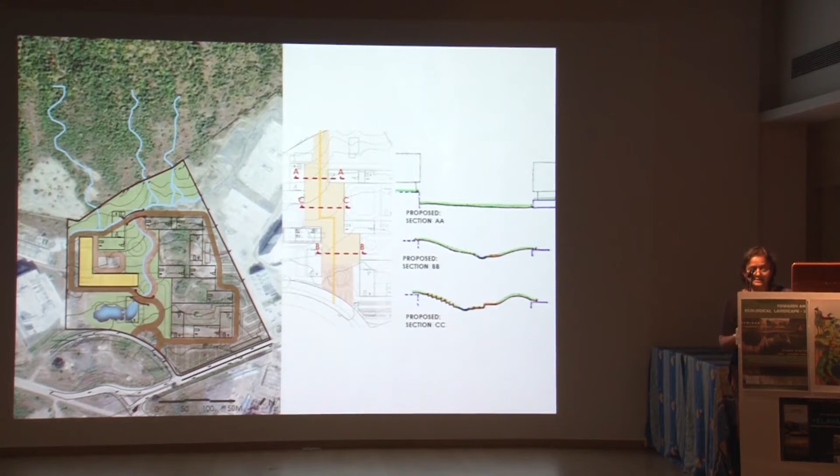So since spatial pattern strongly controls all these 3 aspects, that is flow, continuity and change, changes were proposed in the master plan for vehicular movement and also the grades, resulting in a continuous valley flanked on either side by undulations that connect the built form with the land, a depression towards the lower end, that is the southern end, and a few pocket gardens as outdoor building extensions. No soil or murum was borrowed from outside the site for any of this activity.

The bottom of the valley is designed as a bioswale to carry, filter and recharge water, terminating in a water garden that overflows into the quarry. Capacity of the quarry is increased by raising the sides. Undulations are visualized as forests of local, environmentally beneficial vegetation, whereas pocket gardens are manicured exotic extensions of the built form, and are very much restricted in area.

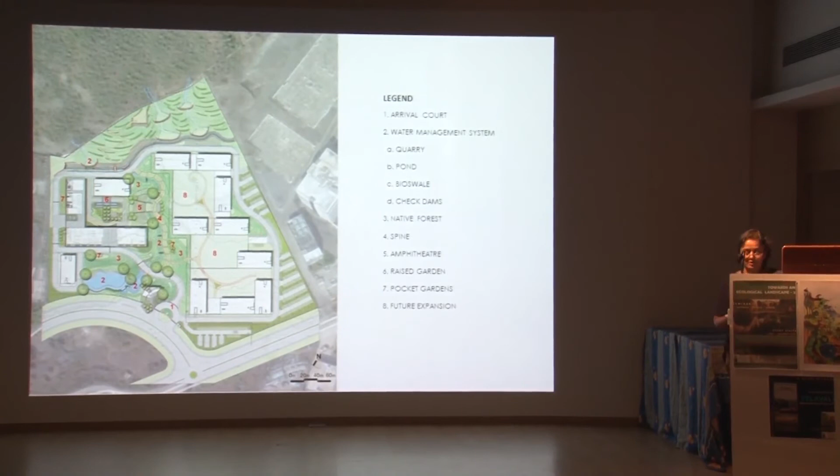The curvilinear forms help in many ways. We thought curvilinear forms would help us in achieving what we wanted to achieve. We thought that they'll help us in creating diverse microhabitats, they'll help us in increasing travel time of the water because the gradient is substantial, and they also will help us in increasing the surface area for plantation.

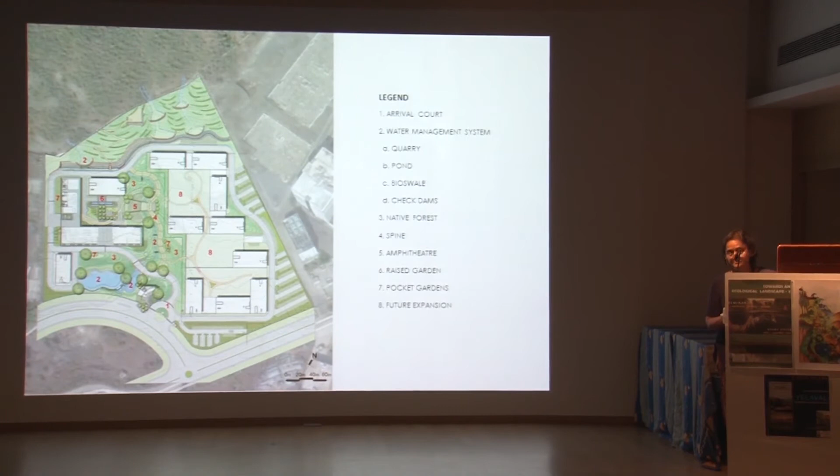Transitions and edges, this was the second aspect we focused on. Transitions and edges, we feel, also play an important role in creating corridors as well as microhabitats. So as I showed you in the earlier slide, we worked a lot on how one landscape component merges, or connects with another landscape component.

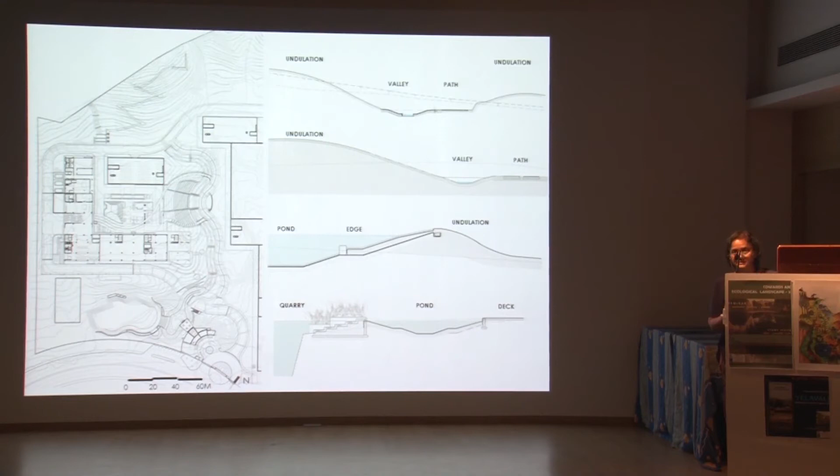The third important aspect of this exercise was planting design. And the basic principle was try and get the right plant at the right place.

It was a conscious decision not to create generically ideal conditions for planting of major areas by borrowing soil from outside the site. So existing murum, which came out of the construction, and there were some areas of black cotton which were getting constructed eventually. So the black cotton from those areas with no inorganic additives is used as a planting media for all areas except for the pocket gardens.

Various planting typologies and sub-typologies were identified. For example, foothill, forest area. Within forest area, again, what would go on the edge, south-facing slopes with least backfill, east-facing slopes with substantial amount of backfill. Similarly, swales and pond, the bottom of the pond or bottom of the swale, the edges depending upon their moisture content. And shortlisting of plants was done with the help of team Oikos.

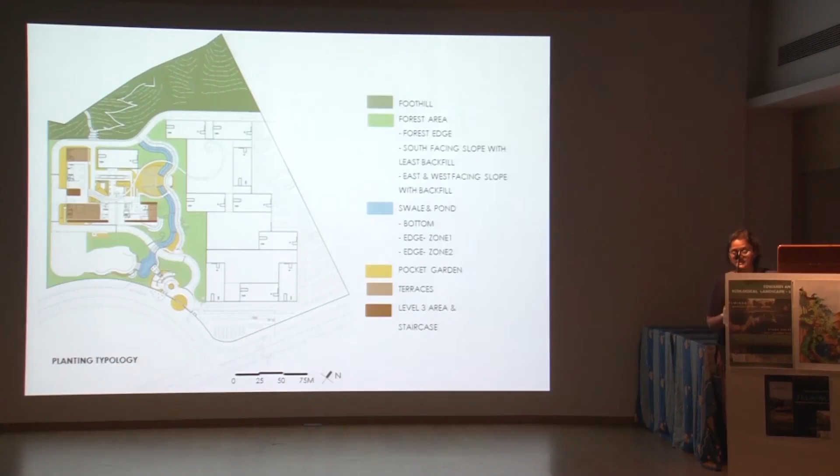Plants were ordered at least 9 to 10 months in advance, because getting some of these species in large quantities was a big challenge. This was done before even the planting plans were made. So we were helped by the Oikos team with the shortlist of plants, but as we had very little knowledge of most of this vegetation, we had to do a lot of studies to understand their visual qualities, seasonal changes, growth rate, because we wanted to look at the whole thing not only as a mixture of species, but compositions which are also aesthetically appealing.

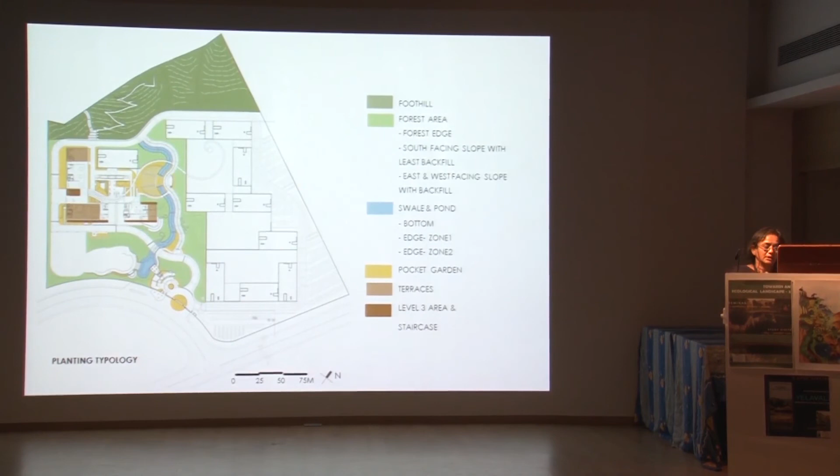So the first component was the foothill. So this has been looked at as a continuity of the hill landscape beyond. Species that are dominant on the hill are used to create planting structure with random mixing of other beneficial species. These slides show some of the species that we selected for plantation.

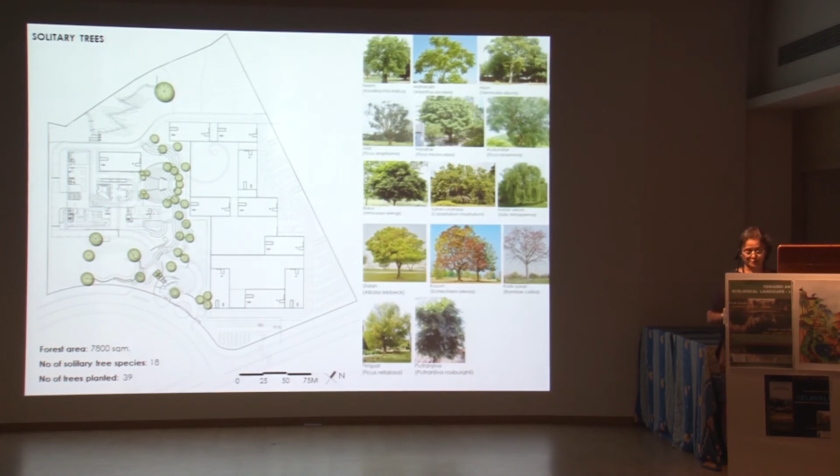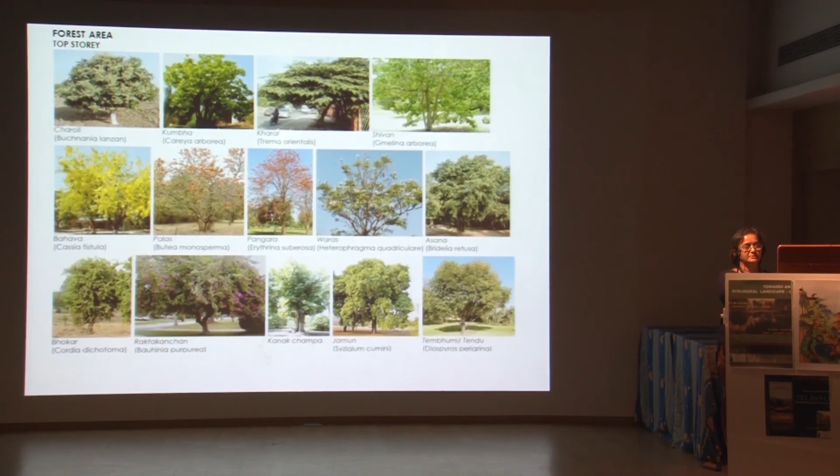The second was all important locations were marked for planting of very large trees, some of which eventually would be key species. For this, again, different species were chosen. Then the forest is a carefully planned mix of diverse species in 3 stories. Plantation is fairly dense. Large part of the forest floor is left open to develop on its own. So these are some of the species that we chose for planting in the forest patches.

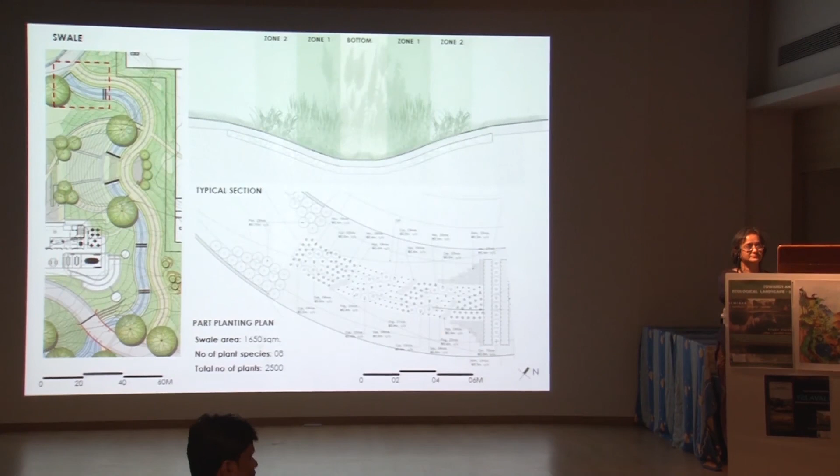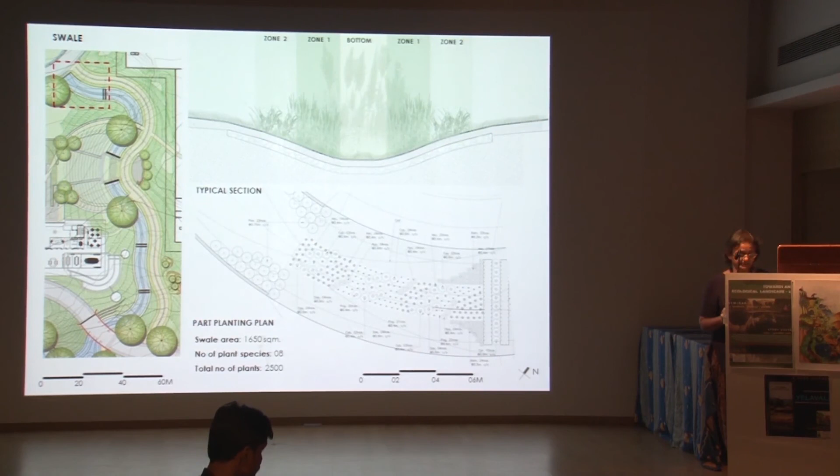Pond or water garden planting is approximately a proportionate mix of submerged, emergent and floating plants, and the selection of the plant varies as per the water depth. Same is applicable to the bioswale. So bioswale planting is also based on expected moisture and water level in the section. While designing, the challenge was to understand not only the environmental compatibility but also the aesthetic compatibility of various plants, as they are rarely seen in designed environments. So this is for the swale.

So the attempt here is to create a community of diverse species as against conventional mass of single species. As a management policy, it is decided to reduce the irrigation water over next 4 to 5 years considerably, also hoping that being local and diverse, planting should withstand better to pests and pathogens, hence chemical pest control is strictly prohibited. Apart from invasives, no other new growth is to be removed from the planted areas. And as time passes, we expect the landscape to mature as a living system and hopefully a new pattern will emerge.